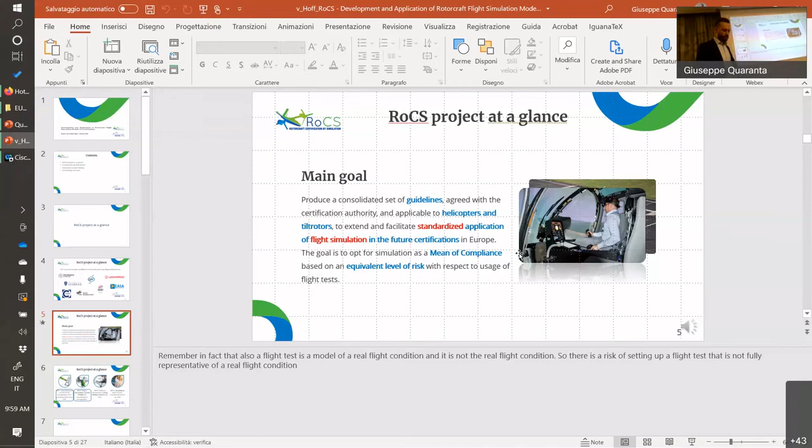So the RoCS project obviously has a number of work packages. Right now I want to focus mostly on the first two, but work package number one focused on identifying from the certification standards which elements of those we think are or potentially could benefit from certification by simulation. There are certain aspects where we think the ability of simulation models just isn't there in the near future to replicate flight tests, but other parts where we think in the near term this could potentially be either augmenting flight tests or replacing flight tests.

In the second work package, we look at the simulation models and what fidelity they would need specifically for the certification paragraphs we identified in the first work package. Then there's a third work package that is focused on the cueing - so what does the simulator need to look like? There will be a separate presentation on that later today.

And finally, as stated, the output should be a set of guidelines. So we have to gather all the findings from the preceding three work packages, put out some form of guidance that hopefully is accepted by the community.

So certification by simulation obviously has a lot of potential. First off, it's basically the triangle you saw in the previous presentation. First one is risk. Obviously, flight testing inherently is risky, some flight tests more so than others, and mitigation of those risks is not always possible. Flight simulation provides a means of testing the extremes of the envelope in a safe manner.

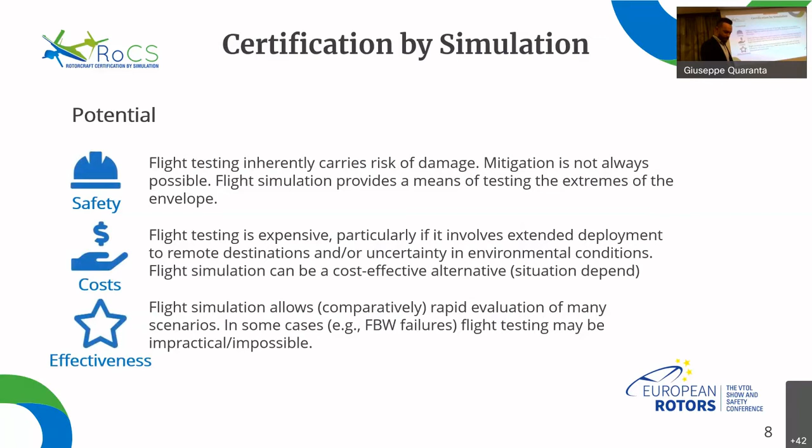Obviously, there are still challenges that we're facing. Otherwise, simulation would already see widespread use. First and foremost challenge is fidelity - not only in achieving the required level of fidelity, but also in defining and measuring the level of fidelity that's needed for a specific certification task, and doing so at an acceptable cost.

Another challenge, which is different from the use of simulation in training, is validation. Obviously, every simulation needs to be validated, but in this case, at least a portion of the flight test data simply isn't there. So you will have to rely on some measure of extrapolation - that could be in altitude, it could be in the proportion of the maneuver, but somehow we need to demonstrate that the simulation is credible, also outside of what we tested.

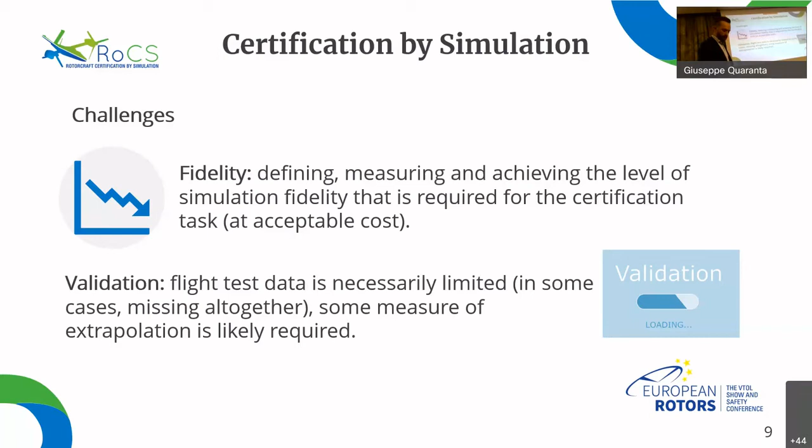In terms of current practice, we saw already in the previous presentation that simulation is being applied already in certification. The certification standards allow for this to some extent. Specifically in paragraph 21, it states that compliance demonstration must be shown by tests upon a rotorcraft of the type for which certification is requested, or by calculations based on data equal in accuracy to the results of testing. So simulation is in this case a form of calculation, and equal in accuracy, I think, is an interesting statement that we'll come back on later.

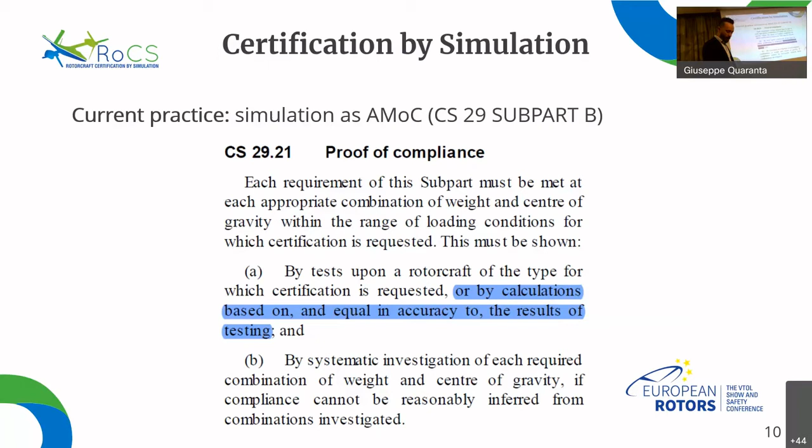If we look at the guidance for certification standard 25, it's a fixed wing standard. They already mentioned three of these, so I'll skip those. I think another example is where certification by simulation is already allowed, accepted - in supplemental and derivative type certification. It's a little bit of a different scenario because it presumes that you have demonstrated your compliance on the aircraft by flight test previously, and now you add a modification in the flight test. So it's a slightly different scenario, but the other ones obviously: demonstration too risky, environmental conditions are difficult to attain, we have multiple pilots and you need to show repeatability, and failure cases.

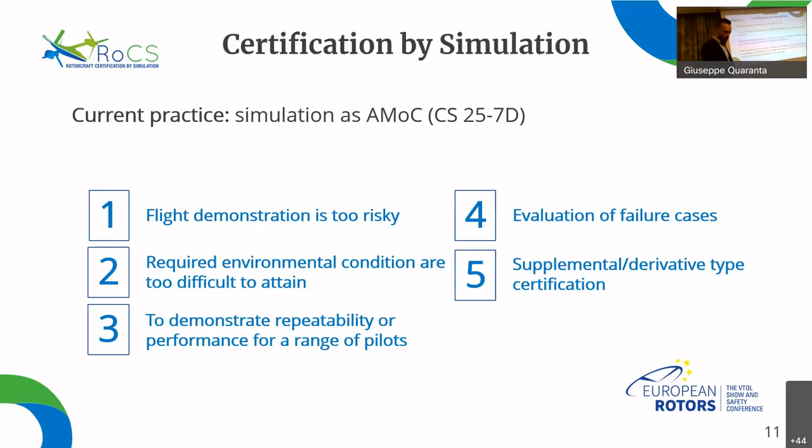Looking at AC25 again, fixed wing guidance, it talks about the criteria that apply to the simulation we're trying to use for certification. It says a number of things, but amongst which are that the simulation should be of a type and fidelity that is appropriate for the task. So that's very vague. I'm not sure what anybody can use from that.

It also says that the level of substantiation of the simulator to flight correlation should be commensurate to the level of compliance. Very nice sentence. Basically means that the closer you are to non-compliance, the more accurate your simulation is.

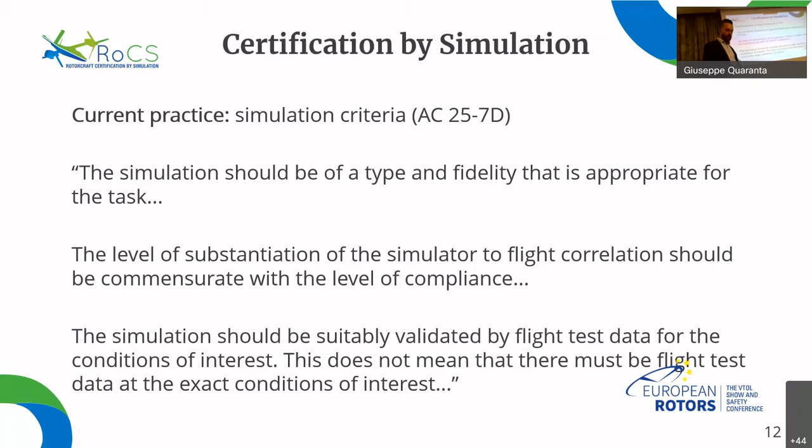And obviously the simulation should be suitably validated by flight test for the conditions of interest, but that does not mean that the flight test should be at the exact conditions of interest. So this allows for a measure of extrapolation. Stated, this is fixed wing guidance.

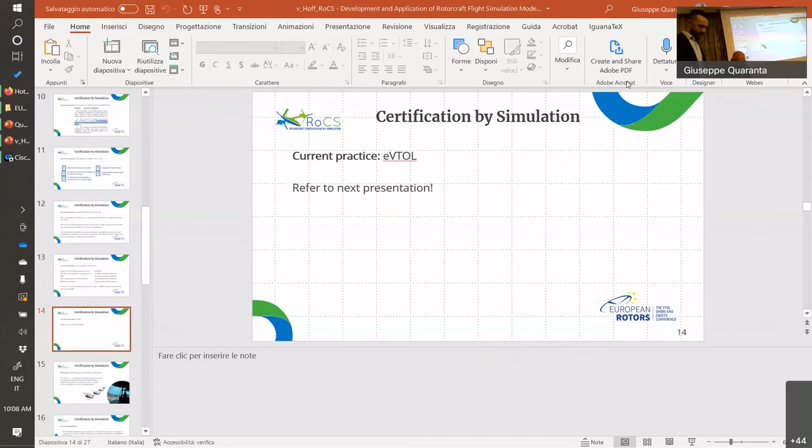Right, so another example of current practice is eVTOL, but there's such a presentation that I won't go into any detail.

An example was already presented in the previous presentation by Andrea, power off landing, AW189, but also other aircraft. I just wanted to highlight here that the guidance specifically for this maneuver, because it's been recognized a long time ago that it's a difficult and dangerous maneuver to perform, already states that simulation can be an acceptable alternative. That is not the case for many of the other certification paragraphs.

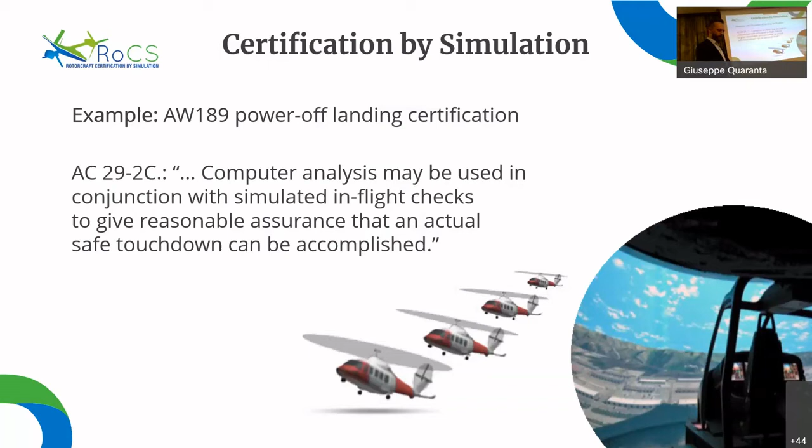So future perspective, what it is we're working towards is a standardized authority accepted use of flight simulation to support, augment, or replace flight testing for Rotorcraft certification. And talking about flight certification status, that also means that there will likely need to be a shift from certification flight testing to flight testing specifically for development.

So flight testing for certification will be expanded with dedicated testing towards validation, with the aim ultimately of producing demonstration compliance flight tests, reducing the total number of flight tests.

Talking about simulation fidelity, I don't want to go into a lot of detail on everything, so just a few items to highlight as a starting point. We are presuming that depending on paragraph and the certification standards, we'll either use a desktop or a piloted simulation. Pilot simulation might be hardware in the loop if so needed. But simulation in that sense is not restricted to pilot simulation.

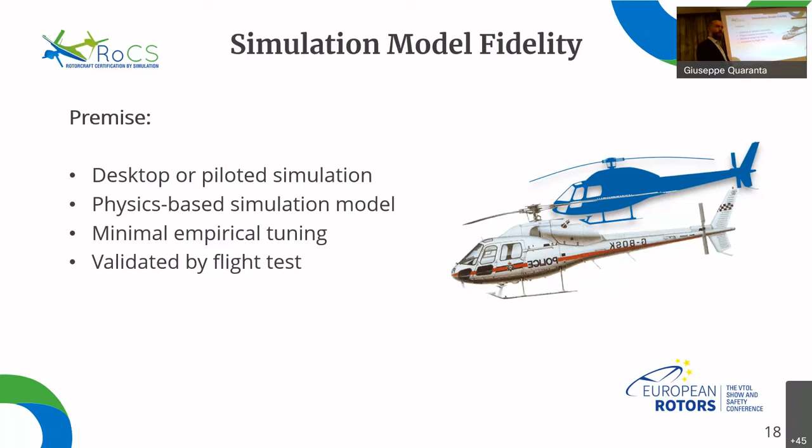When we talk about simulation fidelity, we're actually talking about two different things. One is the predictive fidelity and the other is the perceived fidelity. One is just, does the model recreate reality? And the second one is, does the pilot feel that reality? Together that forms simulation fidelity. In this presentation, because I'm talking about simulation model fidelity, I'm not really talking about that second aspect.

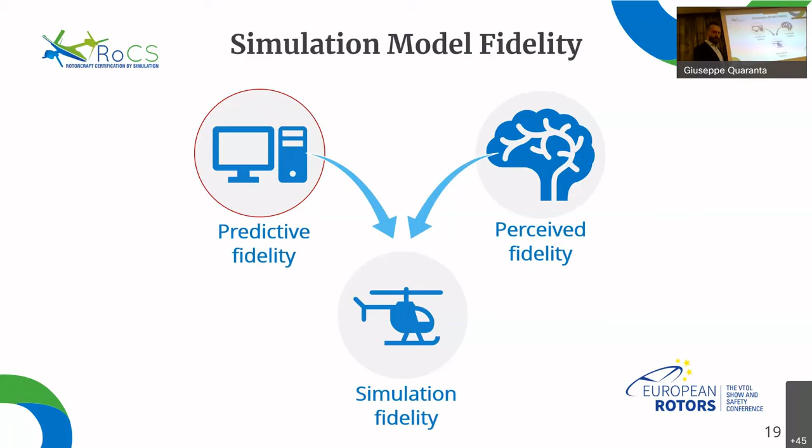So one of the questions is, what requirements do we need to set for fidelity? Can we specify a particular requirement for all of the standard? Probably not. So how do we go about defining how good the model needs to be?

The typical approach that's being used now for training simulators is tolerances, typically plus or minus 10% on a number of parameters. This works well for training. It's been demonstrated to work, it's been used for a long time, it's intuitive, people really understand what it is you're talking about. But one of the questions is these tolerances, this plus or minus 10%, where does it come from? And is it suitable for this particular application? It seems to work for training, but what tolerances do we actually need for when we apply it to certification?

Another drawback, if you purely follow the CS-FSTD standards, is that there's no dependence on the proximity to non-compliance. So that's not in line with guidance from AC 29: the closer you get to non-compliance, the more accurate the model, therefore tighter tolerances.

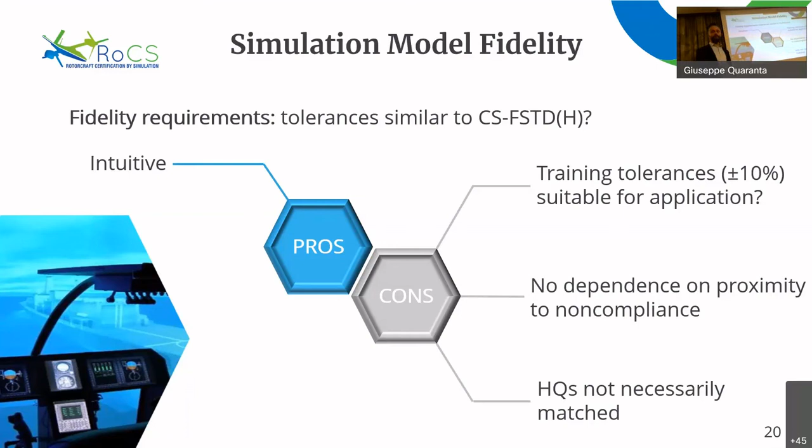And we know from past experience that it's possible to develop a model that meets the requirements for the CS-FSTD, but the pilots will not rate them with the same handling qualities. So if you're using simulation for a handling qualities assessment, obviously you want to have the same handling qualities. So tolerances by themselves do not appear to be sufficient.

Talking about handling qualities, you very quickly start talking about ADS-33. There are some advantages there, because a handling qualities rating allows you to measure not only task performance but also the compensation of the pilot. It involves both time and frequency domain metrics. We know that purely time domain loses some information.

But again, here on the con side, tolerances need to be justified. You have these nice charts, boundaries for different handling quality levels. But just on the boundary, does that imply a different tolerance? We don't have an answer to that at the moment.

The question is also whether those tolerances should be dependent on the level of aggression of the pilot or on the underlying handling qualities. And the handling qualities themselves don't have a direct relation to the compliance limits. So again, using just the ADS-33 type metric alone won't get you what you need.

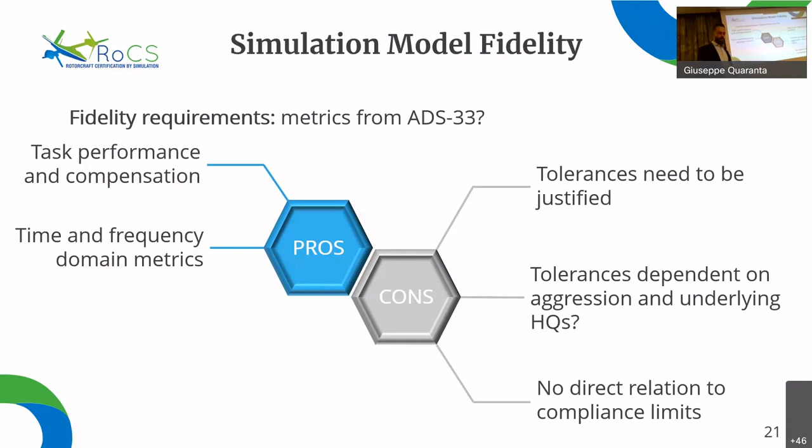Another approach would be to look at maximum allowable error. This is just an example of, in this case, y-axis being collective, x-axis being weight. So you can imagine the simulation can be used to predict what your control margin is over the full range of your envelope, but you might not have flight test data. So for the part that you do have data, you can demonstrate what your error is relative to flight test. But then how does that error develop?

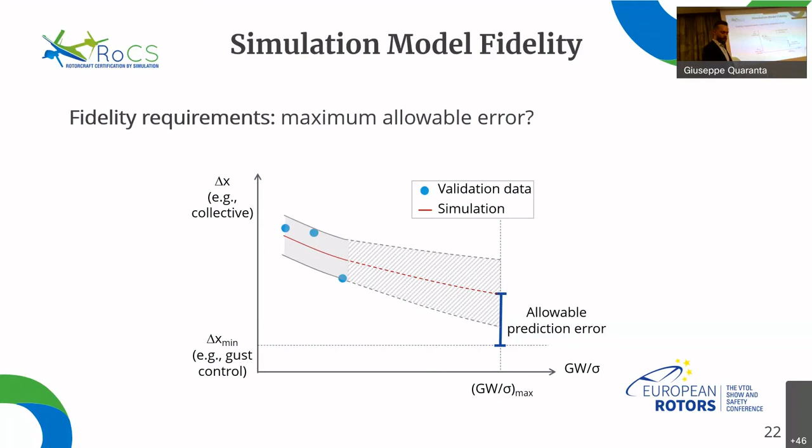But still your simulation does predict a certain margin from the limit. So in essence, your allowable prediction error should be equal to that margin, because if you predict you're there, then you're safe. Obviously, that's not in line with the accuracy statement from the standards. So the question is whether or not this is acceptable. Probably not if your prediction error becomes very large.

So some of the questions to be answered when we talk about fidelity beyond the tested envelope. One is, can or should we define limits for the allowable extrapolation, not just altitude, but any other extrapolation dimension? Second is, what is an acceptable time domain error tolerance in the validated part of the envelope, given the allowable error at the extrapolated conditions?

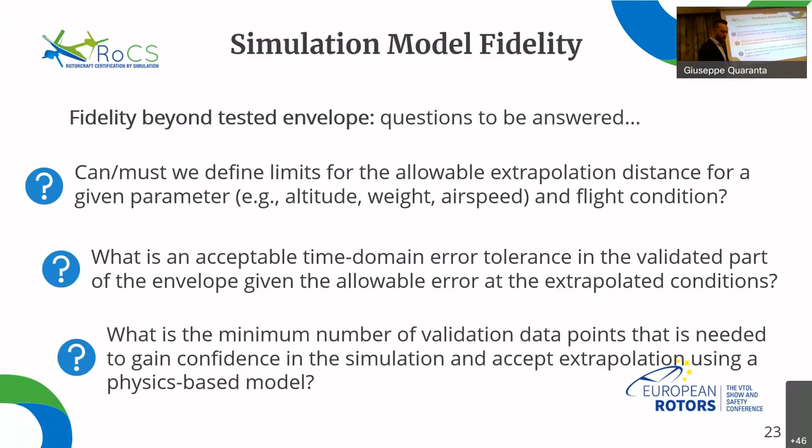And if you're going for that type of approach, what's the minimum number of validation data points that you need in order to gain confidence that you can accept extrapolation? These are open questions at the moment. I don't have definitive answers to any of them. But there are possible ways forward.

One would be to demonstrate the evolution of the predictive error across whatever simulation dimension we're talking about for a given environment using historical data from the past. So we're doing this now within RoCS using the AW189 as the basis, but that's just one aircraft and one simulation environment. So in order for us, the community, to make statements about how the predictive error evolves, for instance, over altitude, you need more historical data, other aircraft, other types of simulations.

Another way would be to try to quantify the uncertainty in your simulation using uncertainty quantification techniques, where you try to predict the probability distribution for whatever output you're looking at. You'll get a large number of simulations, some of which will predict that you are exceeding your certification limit, and there will be a probability associated with those, and you need to find a certain minimum probability which you can set.

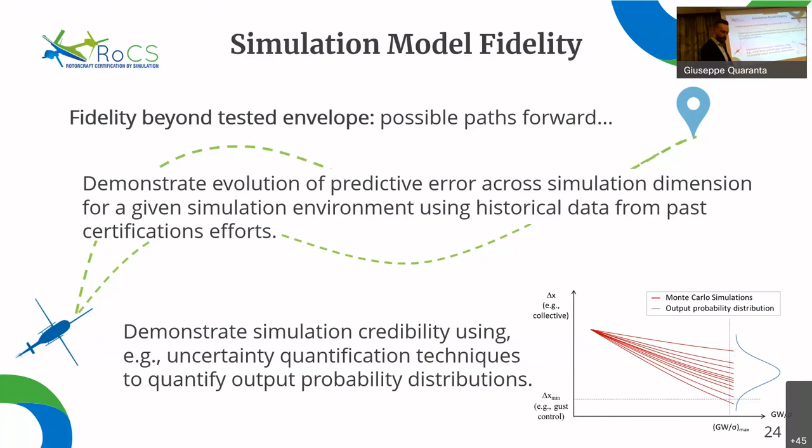Sounds very nice. In practice, it's difficult because it requires you to define probabilities for all the parameters in the models. So how uncertain is your CL, CD? It's not an easy question to answer, and therefore the approach is not easy. But it is a way to gain more confidence that your simulation is giving the right result where you haven't flight tested it.

So concluding remarks: flight simulation promises certification time, cost, and safety benefits, but authority-accepted guidance material is needed to allow its routine application. Challenges still remain in defining, measuring, and achieving at an acceptable cost the level of fidelity required for the specific certification task. And data from previous test-based certifications from various OEMs would be needed, or at least desired, to demonstrate that the predictive error beyond the tested envelope behaves in some predictable way.